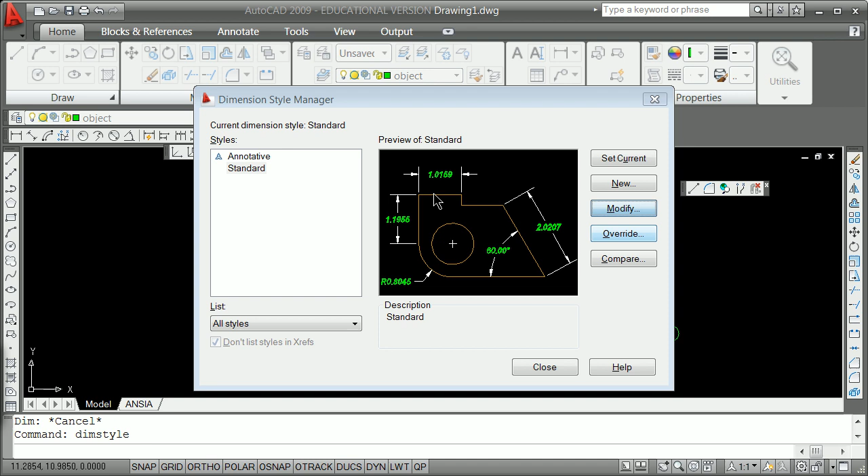I remember dim style. And with dim style, hopefully when I go to here, I can modify only one place, and that is the fit tab. But then again, there's more to it than that, because every now and then you might want to change the primary unit so you don't carry around 4 places that you don't need. I hit OK, and I hit close here.

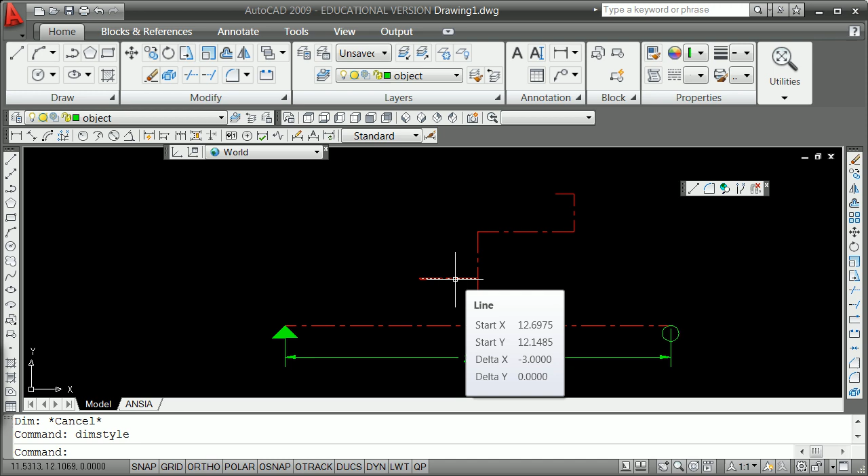Now I see that's 20 feet. The rest we're going to do by, if we remember, we've got a start x, a start y, a delta x, and a delta y. And we change our coordinate system by saying UCS, telling it at the endpoint there, and then entering to accept.

So that when I go to here, that circle perhaps, it shows me it's not a circle. That line is going to show me the delta x and the delta y, and it goes 20. Now that line, of course, is the spine.

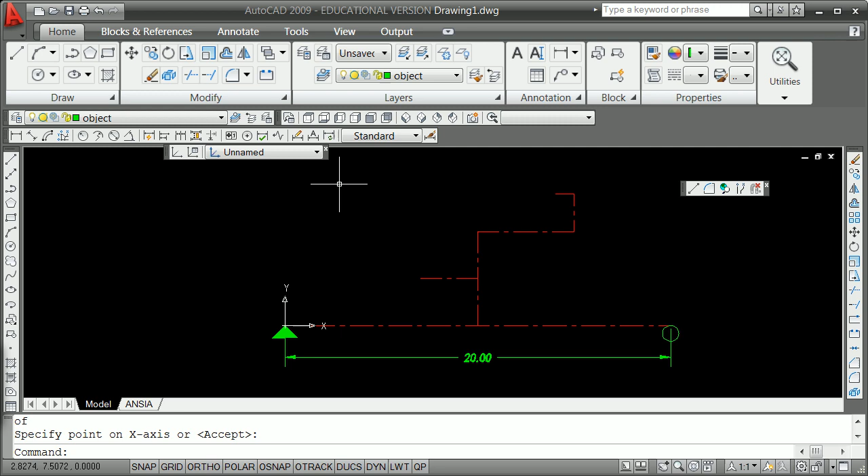I'm going to just draw 3 forces on here. I'm going to draw them in a way that many of us forget sometimes we can do. I can just move my mouse in the right direction, and I'm going to say 4 for 400 now. I'm going to take a line here.

I'm going to go from the end point there. I'm going to go this way. I'm going to say 3 for 300. And I'm going to go a line from the end point here in this direction. And I'm going to say 2 for 200.

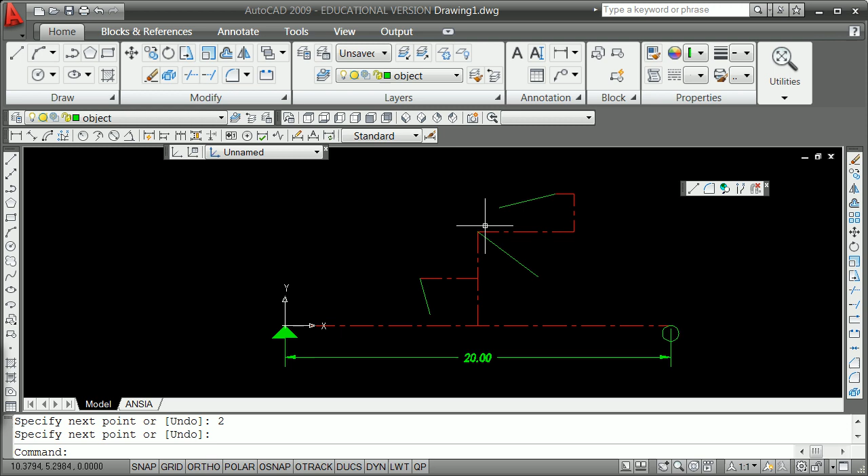Now, what I didn't do, if you remember, I didn't put a little thing on the end, so I'm going to draw a little circle. That's what that Lisp routine was. Draw a little circle out there, so I know that's the front of that circle at the end point of this. I know it's supposed to be an arrowhead, but we're just going to do a circle today. We'll look at that Lisp routine.

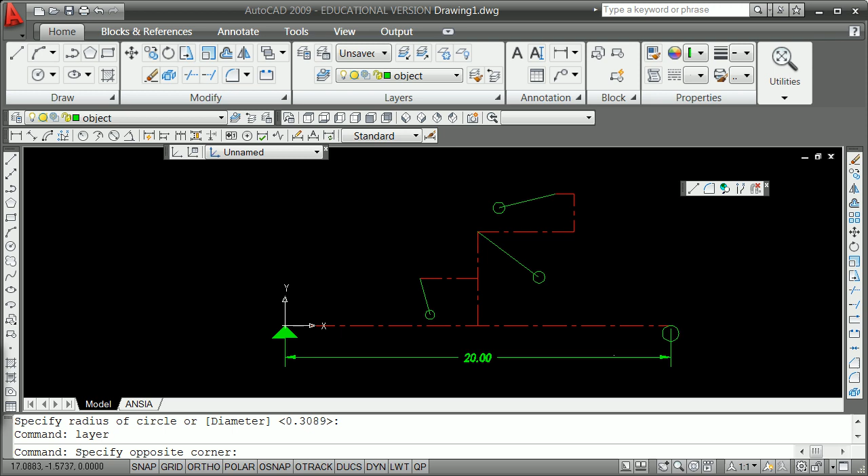All right, first and foremost, remember that, oh well, everything's green. That's not a good idea. So getting in your head that maybe dimensions, things want to be on the right layer, so you might want to take that dimension there, change its right-click properties if you do it that way.

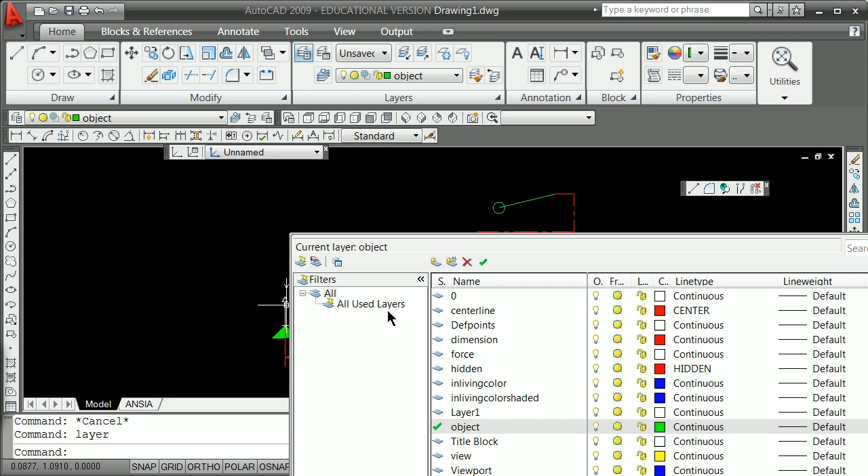However you're going to do this on a regular basis early and often. I'm going to go ahead and change that, of course, to the dimension layer, and you're not going to necessarily need to do that a lot. And then I'm going to realize, that red is red, that's not good, so I can go to layer and go to dimension here and change the color of the dimension layer, especially if you are colorblind.

And close this out. Now let's remember that in fact this is all it's going to be. If I've changed my user coordinate system, all I've got to do is write down in a matrix 7 next to 2.5 over 0.15196 and minus 1.9313, cross across the right way, the right diagonal plus, subtract the left diagonal, go to here.

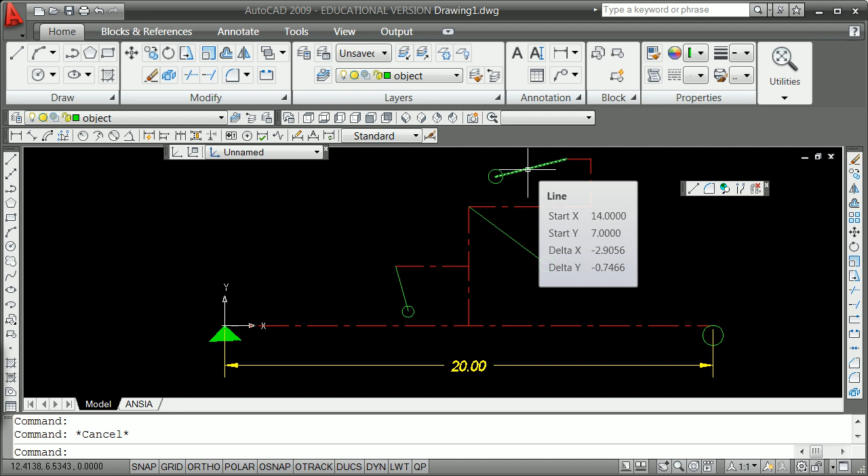Go across, look at those 10, 5, 3, and minus 2.4, stack them xy, xy, right diagonal minus left diagonal, do the same thing here, right diagonal minus left diagonal, and then divide by, in essence, we're going to put a reaction forces here. Right now we're going to go ahead and put reaction forces in, showing us where the lines of force are.

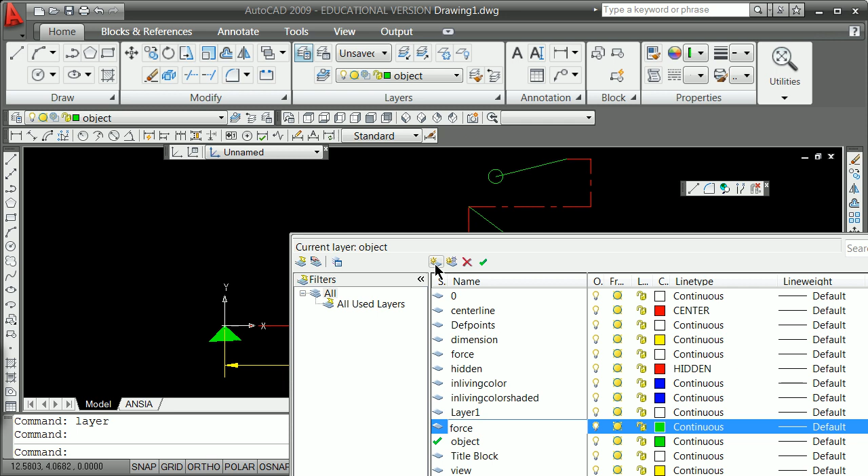So I'm going to go layer, new, force underscore reactions, and I might want to put that in a different color.

I guess I've got it. That one will work for me, and I have to remember that right now the line from there, I put it up in the up direction with a distance of 1. That of course would then in the end be 100 when we're done, won't it? Because our forces are now at a scale of 100 to 1. And then line from the end point here in this direction with 1. Now of course we remember the UCS icon.

It gets in our way sometimes. We need to put things on the correct layer. So I'm going to take that one, that one. These things help visually - that's what your colored pencils are for.

So right there, the force reaction. Realistically, right now, if we're going to use the way of just pulling data off this way, and this way, and this way, we might even want to get rid of those dimensions.

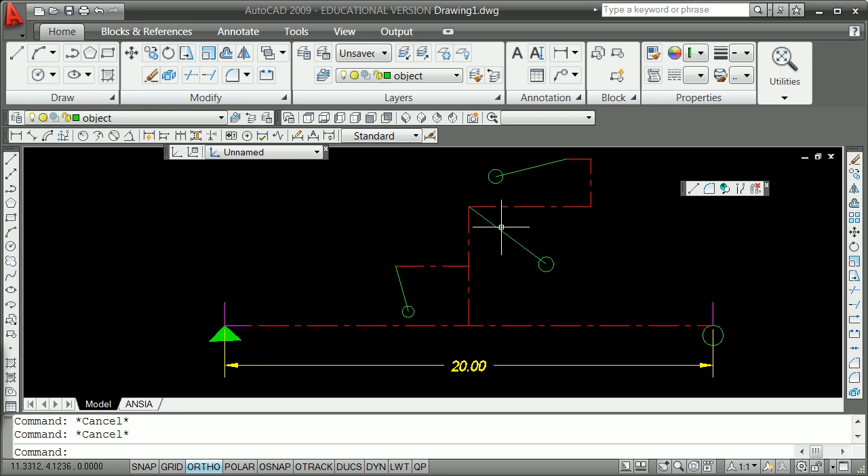So you get used to doing right-click in any tool, bring up a set of toolbars, your layers tool. Hopefully you would go ahead and find the freeze and get rid of the dimension layer. Now, however, let's remember what we can do.

We can do this: minus layer, new, line of force. We can do layer, change, my line of force. That's why you set it with something hopefully that makes some sense. Line of force here, double click.

Great use of the X line. X line from the end point of here to the end point of there. Another great use - I think some of you know how to use the line to the apparent intersection. Line here to the end of there.

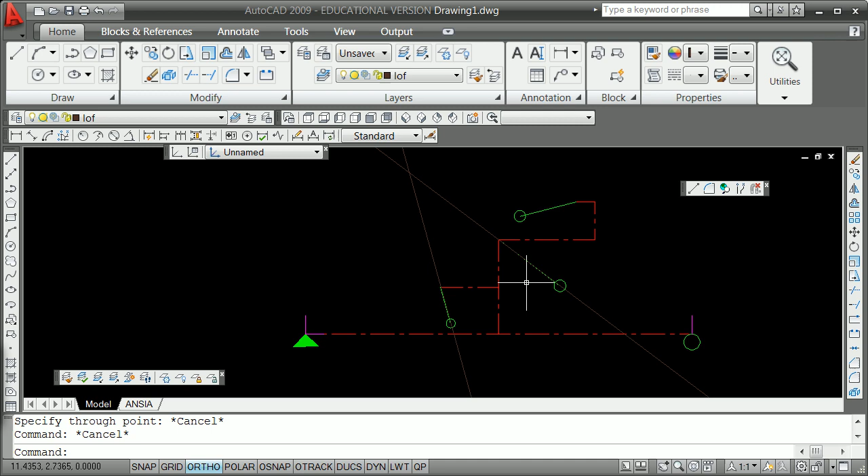Undo. X line from the end point there to the end point there. This should be a preferred first solution for many of you, but only for solving for reactions. Remember, left click, right click, draw order, send to back. Use the tools you have.

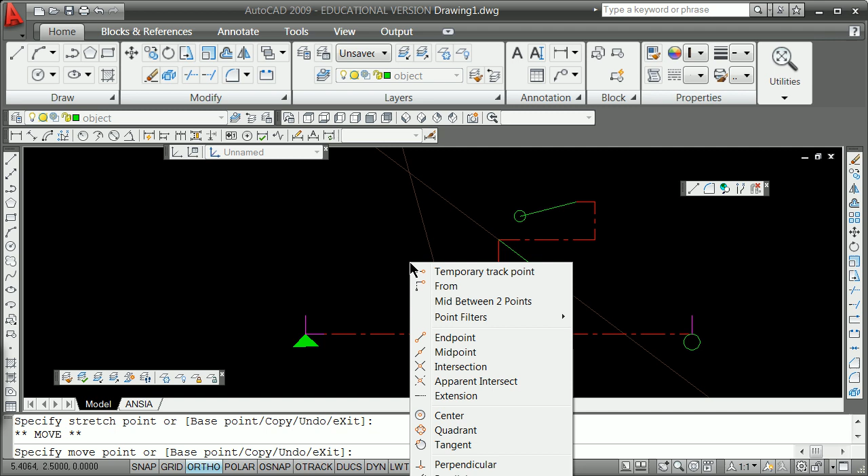And now let's go ahead and, in this case, I'm just going to go ahead and move them around. Though in all reality, you would want to maybe just do some copies. Left click, spacebar, move, shift click to the intersection of that. And I'm going to take left click here, left click, spacebar, move to the right click endpoint of that.

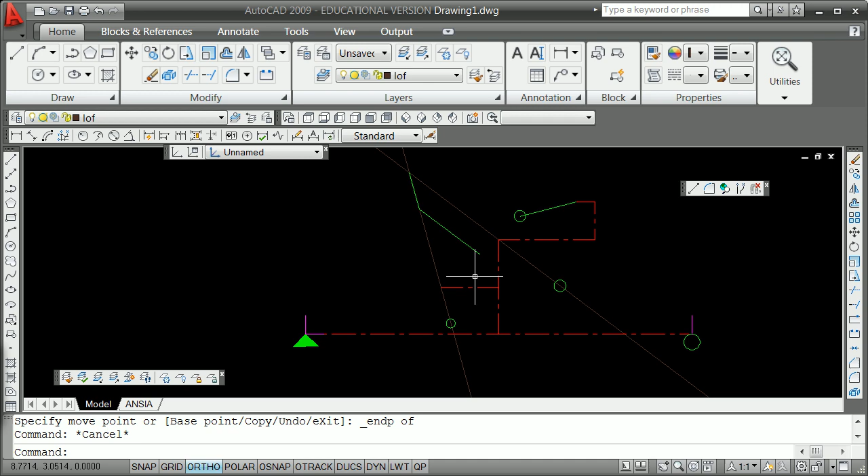And the reason why we go about doing the moving is because we're not going to solve for the forces inside. Otherwise, you really don't want to be doing the moving, because the forces are not here, they're here and here. That said, now we go ahead and match properties to there, and then we do a line from the endpoint there to the endpoint there.

We don't have these anymore - they don't exist in all reality. Those two lines of force don't exist either. And so now what do you do? You do a line, you go back to your line of force.

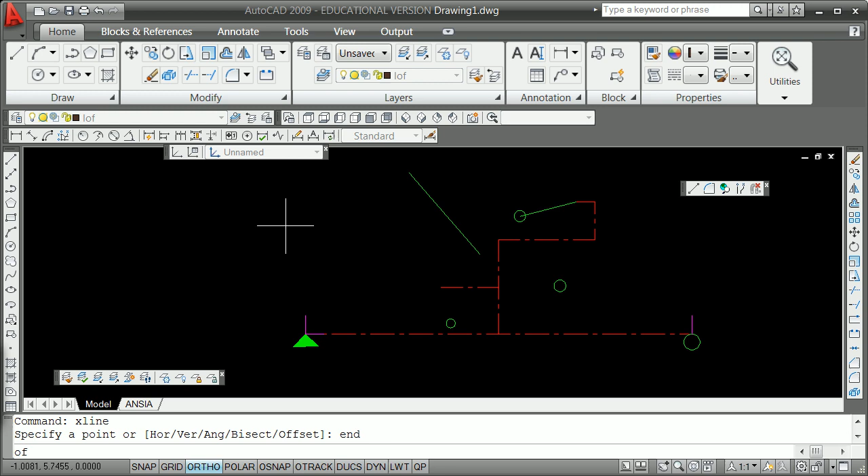Much easier done, of course, on paper. X line from the end of this to the end of this. Now you've only got to move one - well, you got to move two basically, don't you?

So we're going to go ahead and left click this, left click, spacebar, move to the intersection of there. And we're going to go ahead, remember, draw order. We can't see that underneath, so right click, draw order, send to back.

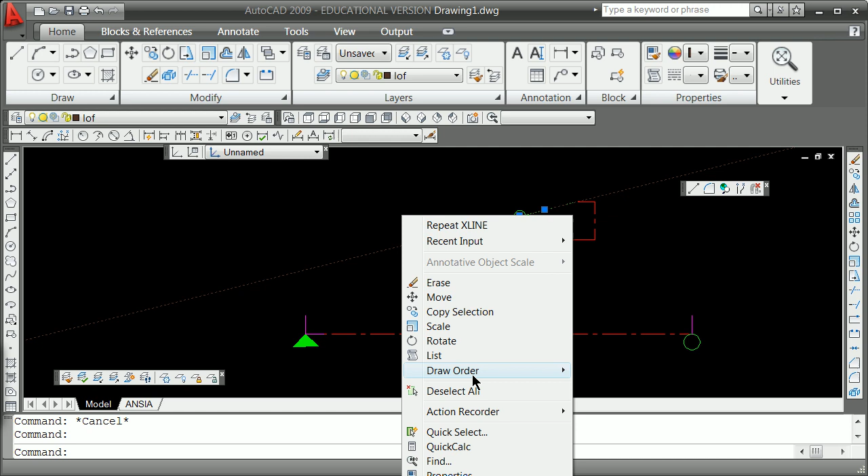I'm going to left click, spacebar, move, shift, right click, endpoint there. And now, of course, line from the endpoint there to the endpoint there. That line should be, in fact, on a minus layer, new, force underscore resultant.

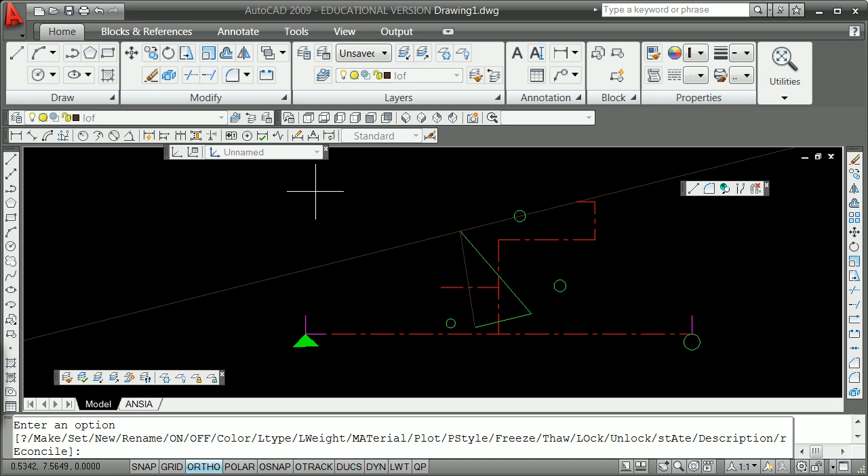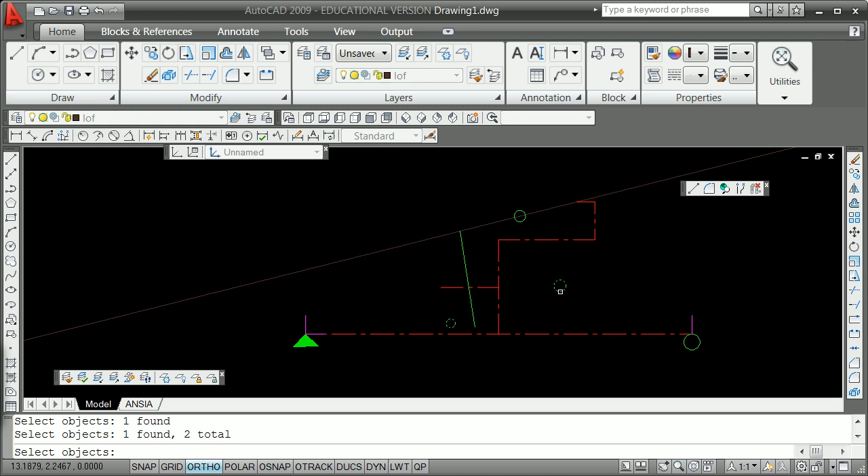Layer - and we're going to keep our resultant in green, though very often you might want to have the green in something else. I'll go ahead and put it in green. If in fact you're keeping your other forces around, you wouldn't want it in green, but those are not there. And this, of course, is in what layer? It's in force resultant. That, in the end, is now a way that you can, once again, do this product.

And so I'm going to do that now. If I hold my mouse over that, I have, in essence, a start X, a start Y, and a delta X. Remember, those delta X's in this case are in fact hundreds.

So my X is 7.9919. My Y is 5.4563. My X is 7.9919.

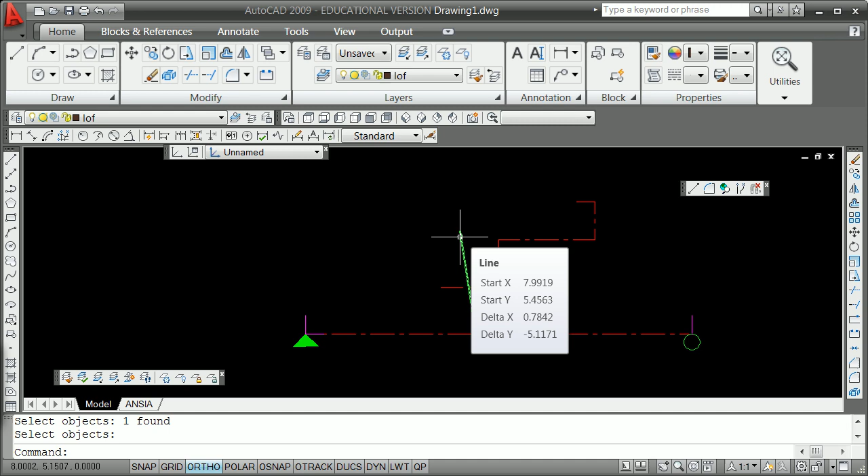My force in the X is 78.42. My force in the Y is minus 511.71. I'm going to pause here and stack that up and then realize that this resultant has to be reacted to by this resultant, and this is 20 away.

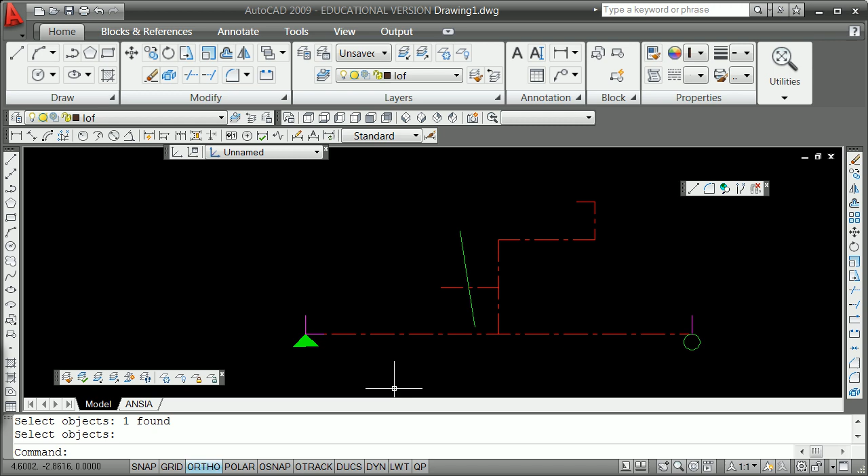So I'm going to hit pause here and bring up a little bit of a PowerPoint. Just realize that later on you have to put everything back - so that's one reason why not to simplify. But in this case, we're just solving for reactions, and that is the sum of the other three forces.

And hit pause. All right, remember we're going this way minus this way. So our numbers were 7.99 times minus 511.71 equals - and I blew my minus there, so you're going to go ahead and minus again: 5.45 times 78.42, and then divide by 20. That's your solution. Thanks for listening.